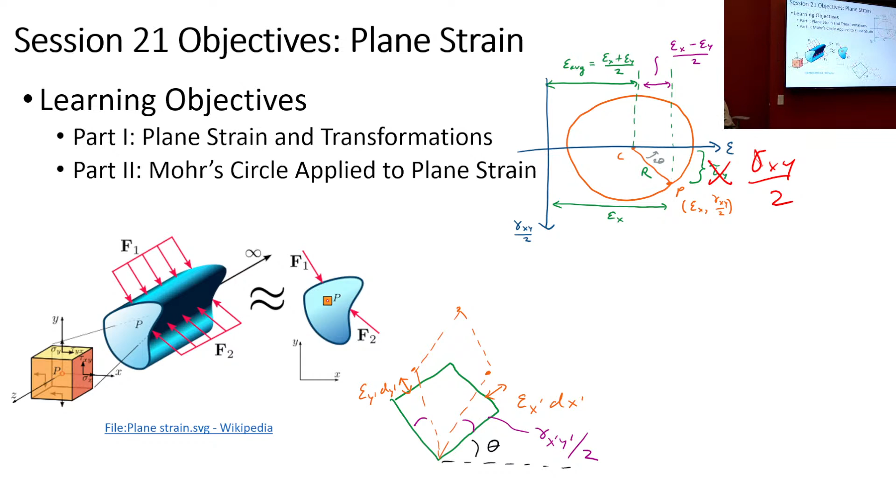And then, of course, we'll talk about how this is applicable to actual structures, and in particular, we'll cover how we use this with strain gauges. It's hard to know exactly what stress might be in a structure. If you've taken a look online, maybe you've seen things like photoelasticity. Sometimes you can get an idea of what the distribution of stress and strain might be in an object through image processing techniques. Another one is called digital image correlation. But the classic method that we use to be able to discuss or analyze what the strain and stress might be is through what we call strain gauges.

So, plane strain. Before we discuss the simplified nature of plane strain, we realize that if we're describing strain, we have 6 components, just like we had 6 components of stress, right? We can have 6 components of strain: epsilon x, epsilon y, epsilon z, gamma xy, gamma xz, gamma yz.

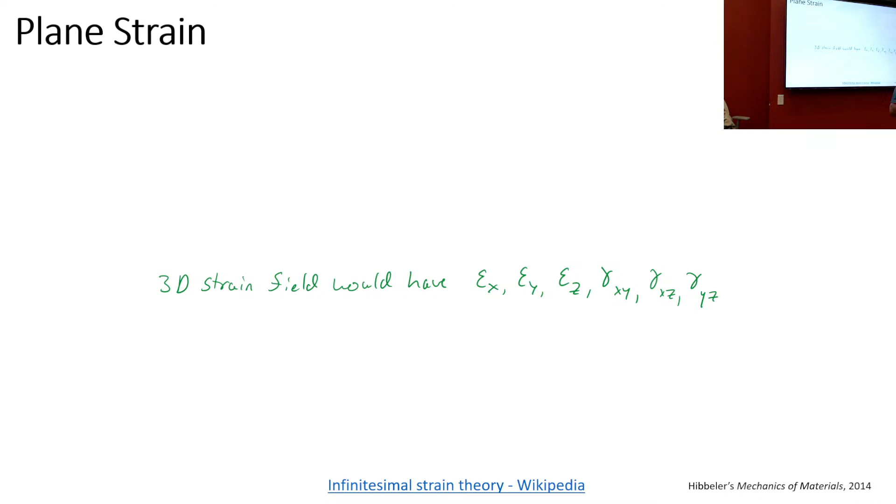But then just like we do with plane stress, where we say we're only really interested in plane stress, we're only interested in 3 components of stress for a plane: the sigma x, the sigma y, and the shear stress. In this case, the 3 components that we're going to be interested in are the gamma xy, the epsilon x, and the epsilon y.

But what are we really doing? What we're saying here is that there's no strain in the direction normal to the plane of interest. So what we're saying is that the strain, for example the epsilon z, that's going to be 0. We're saying that strains like gamma xz and gamma yz, where that second subscript has a component in the normal direction, we're saying those are 0 as well.

Typically, to think about this, we're looking at thick plates. That's kind of the image that we keep in our mind. So what's happening is there's not going to be much strain in that z direction. It's really thick in that direction.

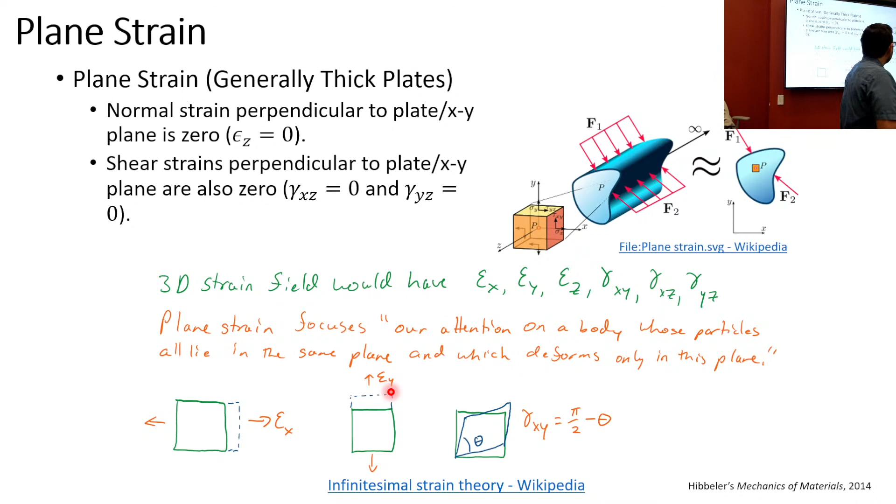Now, when we think about these two cases, the plane stress and the plane strain, we might think, when might they be the same? When might they be equivalent? It's a little bit confusing because we've got something that might be really thin, which is what we typically think about with plane stress. The prime example that we use for plane stress are thin-walled pressure vessels. And what we've said is that the stress in the z direction is very small, we've typically said that we're going to assume it's 0. In this case, we've got something that's very thick.

So when can these two cases be the same? And it's when the Poisson ratio is equal to 0. Now, is that real? Is the Poisson ratio going to be 0? No, not really.

Just as a refresher, what are we saying here? We're saying that if you're thinking about epsilon z, and you have stresses in x, y, and z, these are normal stresses, and we can think about the effect of the stresses in x and y on z. So if there's a non-zero Poisson ratio, then there can be some influence on epsilon z, assuming that sigma z is 0. And that's not what we want in the case of plane strain. In plane strain, what we're saying is that epsilon z is supposed to be equal to 0. So that's kind of the fictitious condition that we can think of when these two are equivalent.

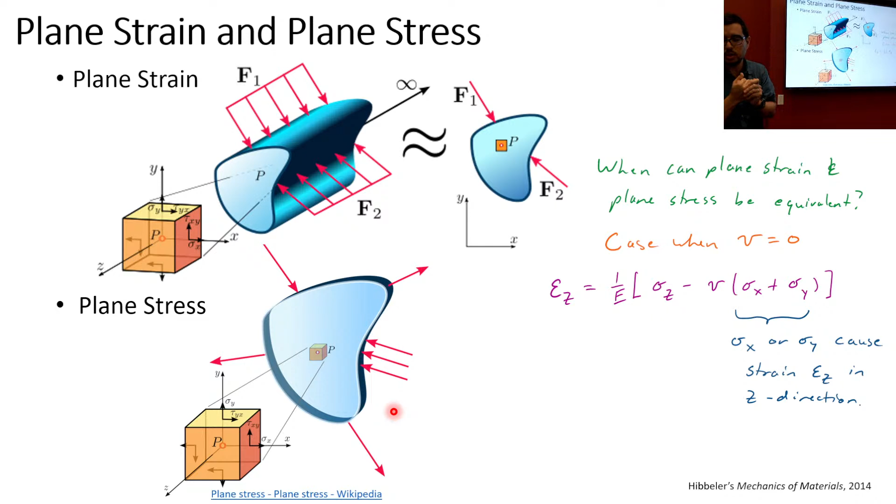We're going to say that epsilon z is going to be negligible in that particular case, at least for our intents and purposes for doing the transformations that we're going to do later. Okay, so now...

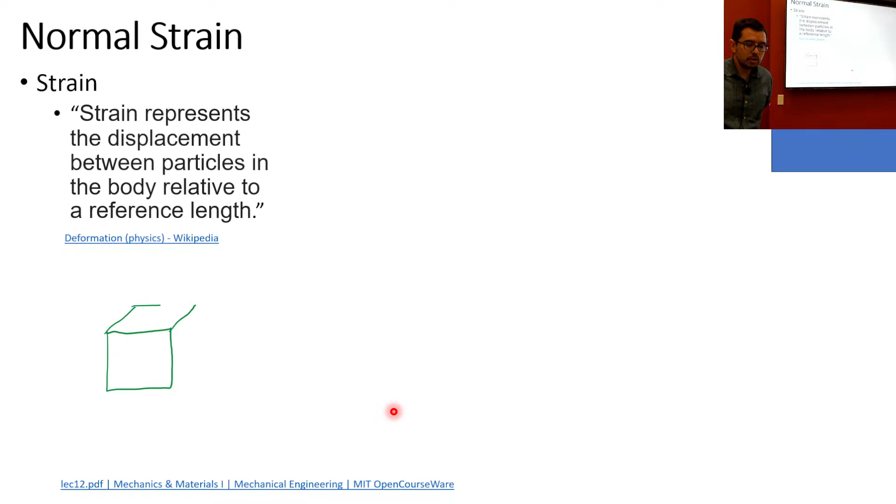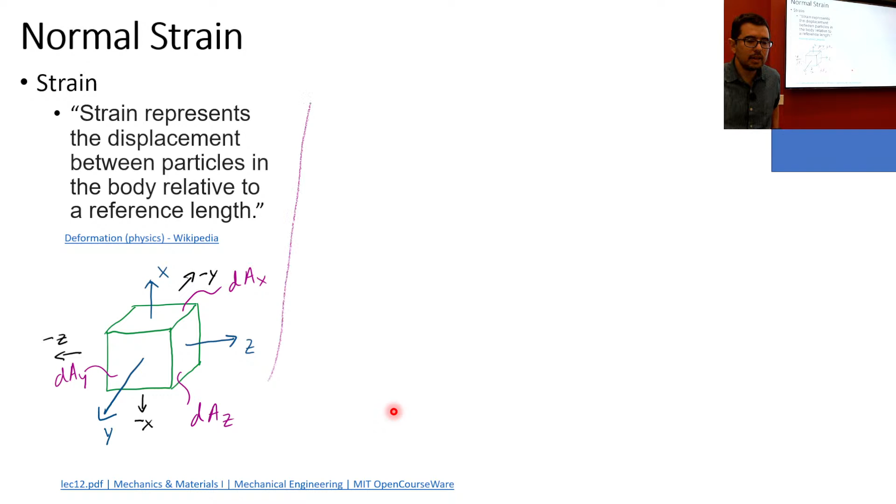Let's review. These slides are from the past, maybe with some slight embellishments, to talk about normal strain and shear strain in a little bit more detail. You can draw this element with some small areas for a type of cube, and we can draw out the 2D profile of the XY plane. This is the same thing we showed before.

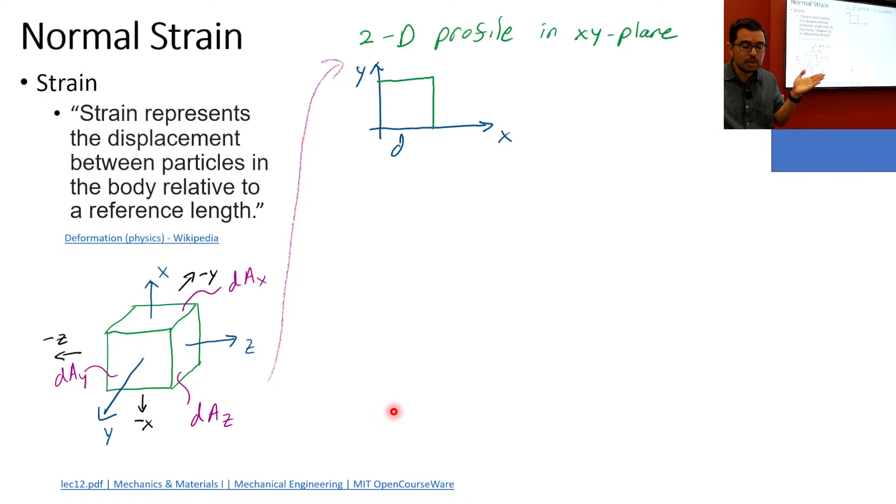We have a dy and dx, and we can think about how epsilon x and epsilon y are going to be influenced here. If there's some delta x, that's going to give us epsilon xx, which we simplify as epsilon x. And if there's some strain off in the y direction, we can think of it as epsilon yy, which is the same as epsilon y. So this is pretty straightforward, and we've kind of covered this.

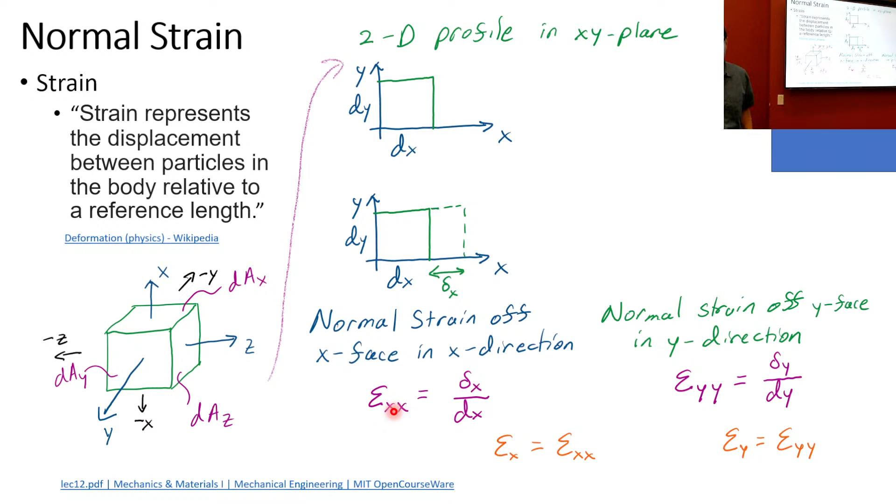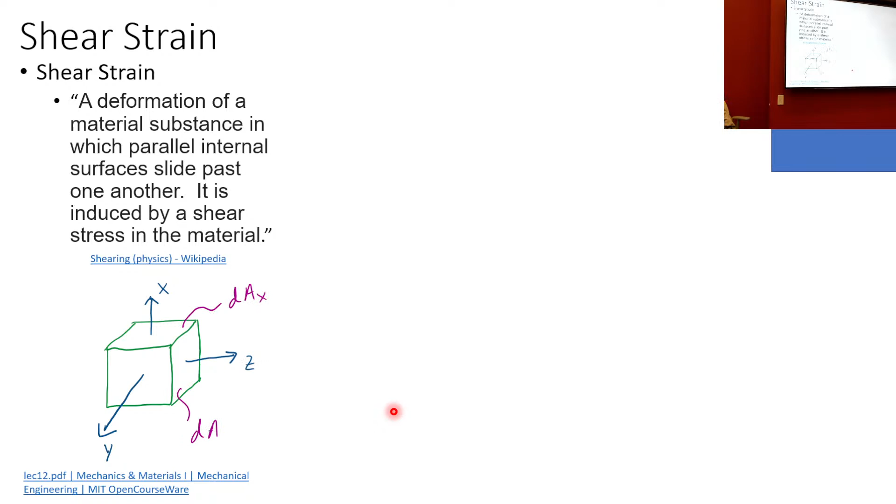Shear strain we've kind of covered as well, but it's a good reminder of what it looks like. Once again, we have our little cube with our coordinate axes, and we can look at the 2D profile in the XY plane. Like I was hinting at before, what we're talking about is we keep the bottom flat and we shear the top. Then we're looking at this displacement here, and this displacement here, and we're looking at the angle this forms - that's the shear strain.

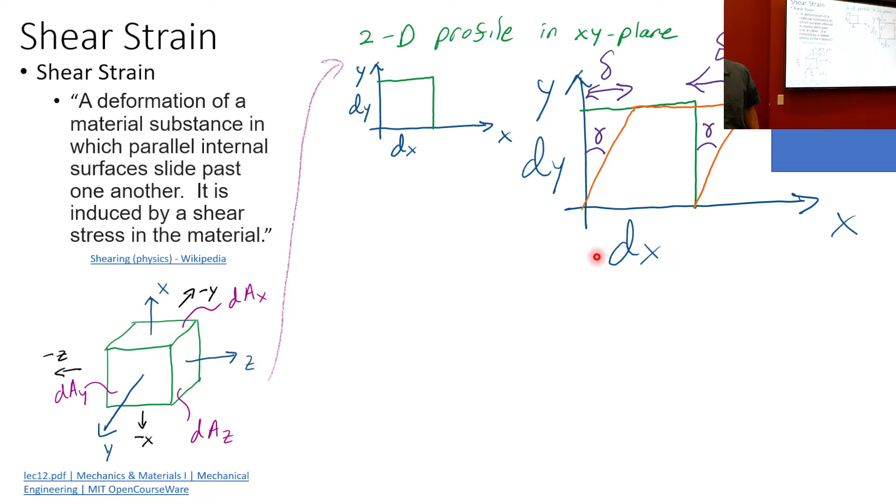Like we were talking about before, to be very clear or more precise, this bottom surface actually comes off for an element in pure shear. So we end up thinking about 90 degrees minus this angle. But in this case, we can say if I want to know this angle for gamma, it's going to be this delta over the dy.

And when you take fluids, you know that's how you calculate and think about shear stress in liquids, based on slipping between plates and the angle that can form. So that's a way that we write shear strain, and we can think of gamma xy.

And again, to be more purist, what you would see here is you're actually thinking about the summation of this angle below and above, and it's going to be 90 degrees minus the interior angle of this four-sided sheared piece.

Now, here are the general equations. You probably want to write them down for the final exam, not for Tuesday, because what we're covering today is not on Tuesday's exam. If you want to see the derivations, you can take a look at Hibbeler's book, or you can click on this link to see the derivations for these transformation equations.

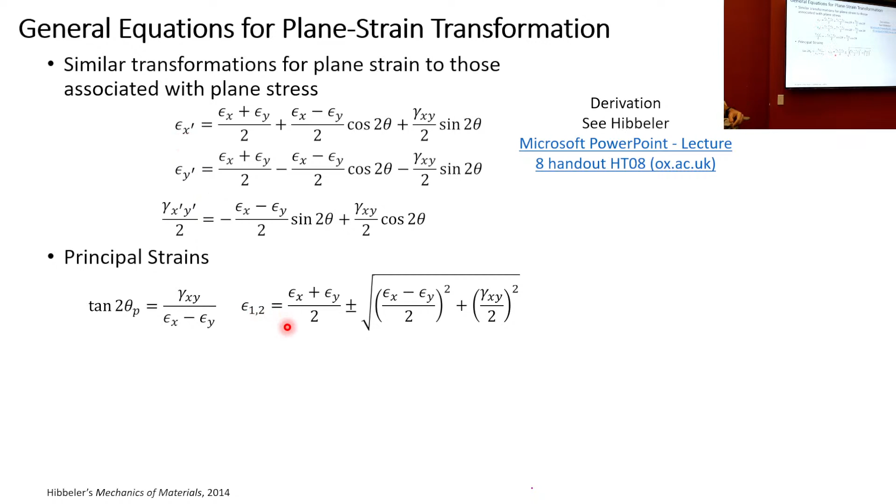Similarly, we can figure out when we're going to max out our shear strain by looking at the angle - looking at the equation here for shear strain, figuring out what the angle would be, and then plugging that back into the equation to figure out what the gamma max in-plane shear strain will be.

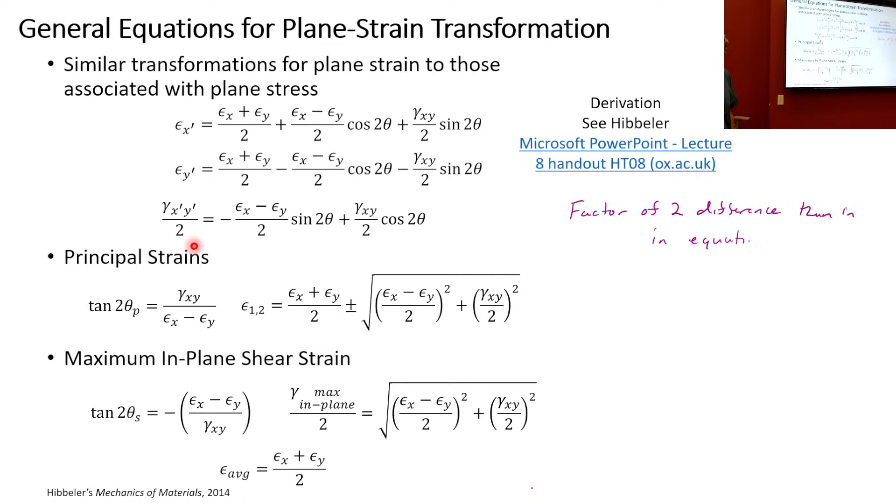These equations have an interesting property, though, right? What you see here is we typically wrote tau. When we're doing the shear stresses, we wrote tau x prime y prime is equal to this quantity, sigma x minus sigma y, or something over 2. And now there's another quantity, where this is not just tau, but it's gamma x prime y prime divided by 2. And so this factor of 2 comes into the equations, and it comes out of the algebra.

And in this case, there's not a factor of 2, right? This is like flipped. So if you had been doing the tau before, you might have had a factor of 2 here. But these equations are accurate. It's circling, like sometimes it was confusing because I circled a nothingness. It's circling that there's nothing there.

If you look at the substitutions, once again we're thinking about tau xy as having these parallel equivalencies. So tau xy goes to gamma xy over 2. Sigma x goes to epsilon x, sigma y goes to epsilon y, and these transformed versions do similarly. Any questions on this?

What is gamma? Gamma is shear strain. And just to be clear, gamma is this Greek letter right here that you're seeing, and this Greek letter is epsilon. Yes, gamma is the shear strain. The clue there is that it's shear when you have two subscripts that are not the same. You have xy as a subscript, and it's the same thing: those subscripts, the first subscript is the face it's acting on, and the second subscript is the direction it's acting.

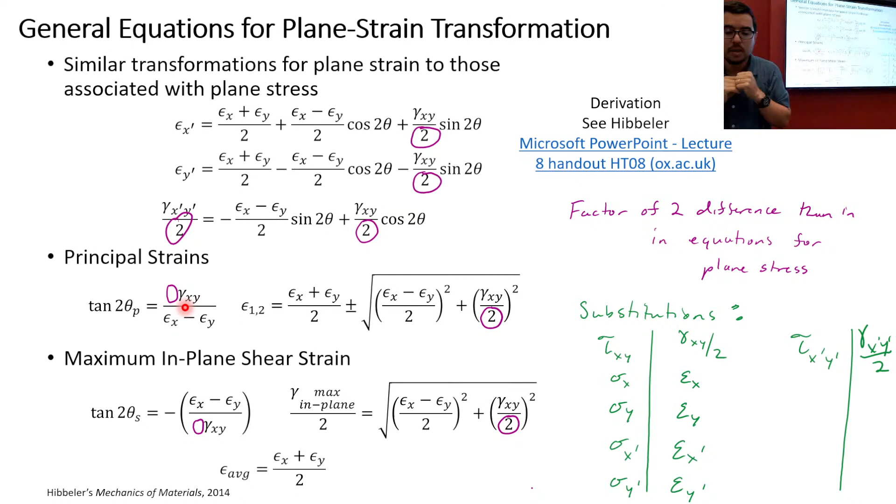And remember, Mohr's circle spits that out to us. Mohr's circle is on a tau-sigma axis, and we're going to cover this in a second. Or Mohr's circle for strain is going to be on epsilon and gamma over 2 axes. So you can get to the state, when you draw the circle, where you have two points on the sigma axis or the epsilon axis, which means the shear is zero in those situations. But unless Mohr's circle is centered on the origin, you can't get a state of pure shear. Because in order to have pure shear, you've got to be on the tau, or the gamma xy over 2 axis. Maybe that was a lengthy explanation, but hopefully that's helpful.

All right, so now let's spend a few minutes looking at an example. What is the state of strain for an element rotated 45 degrees from a condition of uniaxial strain? Uniaxial strain is like uniaxial stress or uniaxial loading, so we've got a strain in one direction.

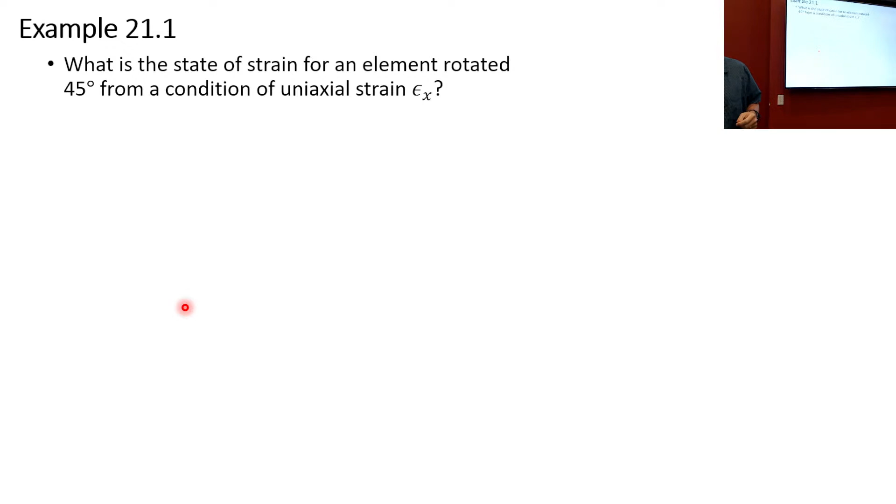These are the same exact equations we just had. What do we say? The element is rotated 45 degrees. That's not rotation of... we're talking about the element, right? On Mohr's circle, that would be a 90-degree rotation, but we'll do that in a minute. So it's kind of just plug and chug, all right?

You take a look at these equations, plug in theta equals 45 degrees, recognize that's 2 theta, so it's going to be 90 degrees. Recognize that in uniaxial strain, in this case we have 0 shear strain, and epsilon y is equal to 0 as well. So we get rid of those other terms, and the new epsilon x prime is going to be epsilon x over 2. We go down to epsilon y prime, plug it in here, and we also get that it's going to be epsilon x over 2.

And we look at gamma x y prime, remembering that there has to be a factor of 2 over here, and we can write out that it's just going to be negative epsilon x over 2. Then we have the 2 and the 2, and so we can say that gamma x prime y prime is equal to minus epsilon x.

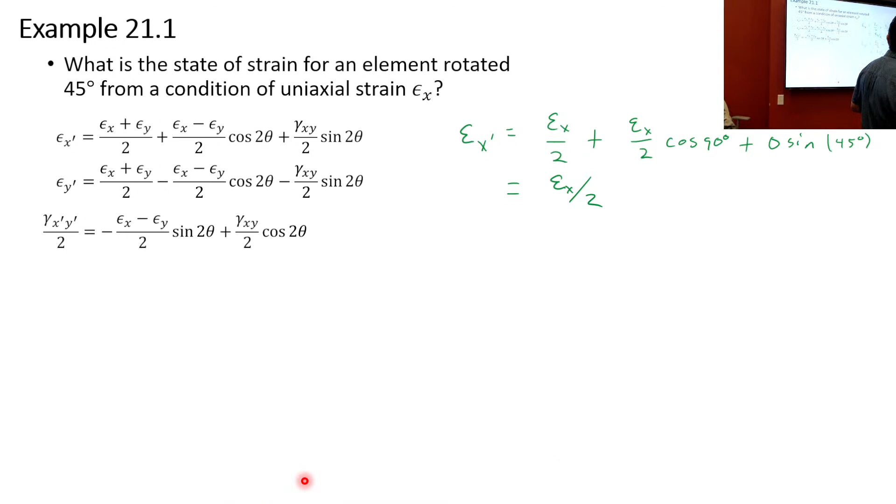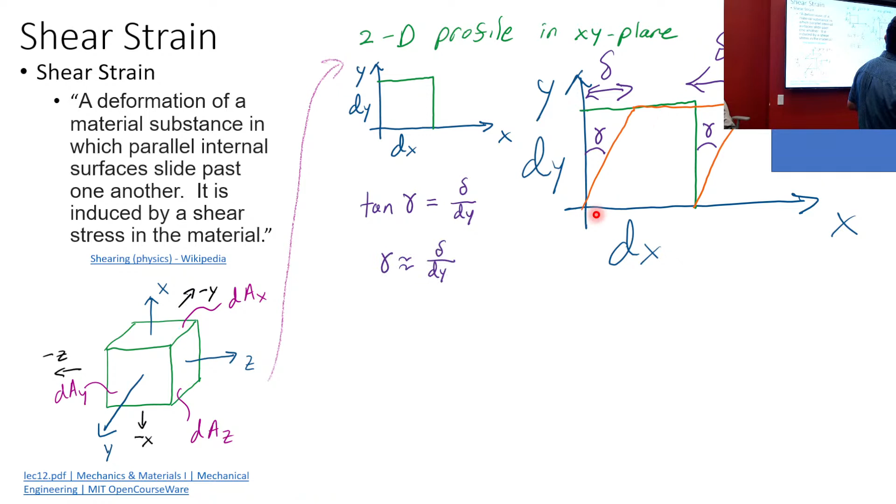Okay, and it's half the shear strain, because if we go all the way back to here, remember we said if I keep the flat bottom flat, then it's just that angle. But if I pump it up, if I let it deform purely, then I have these two angles, and it's the summation. The gamma is the summation of these two angles outside.

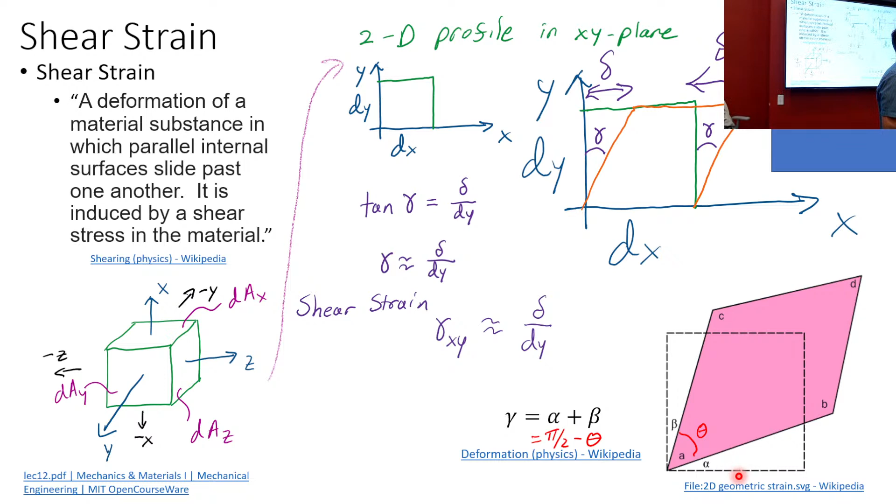And that's why, if it's symmetric, if alpha is equal to beta in this case, then they're going to be equal to each other, so it's going to be half of the shear strain. It's a little confusing, all right? That's why we're trying to clarify things a little bit here with this example.

Other questions on this? Are you raising your hand, Chris, or just stretching? Other questions? Yes, Kevin. So to write up the final answer, to describe the state of strain, would an acceptable answer comprise of strain y prime, strain x prime, and just putting it symbolically like that? Or how would we?

Yeah, so for these, if I don't say use Mohr's circle, just use the equations. I don't like, personally, these plane strain transformations are a little less, they're a little unnerving to me compared to the plane stress transformations, okay? But you don't need to worry about this for Tuesday.

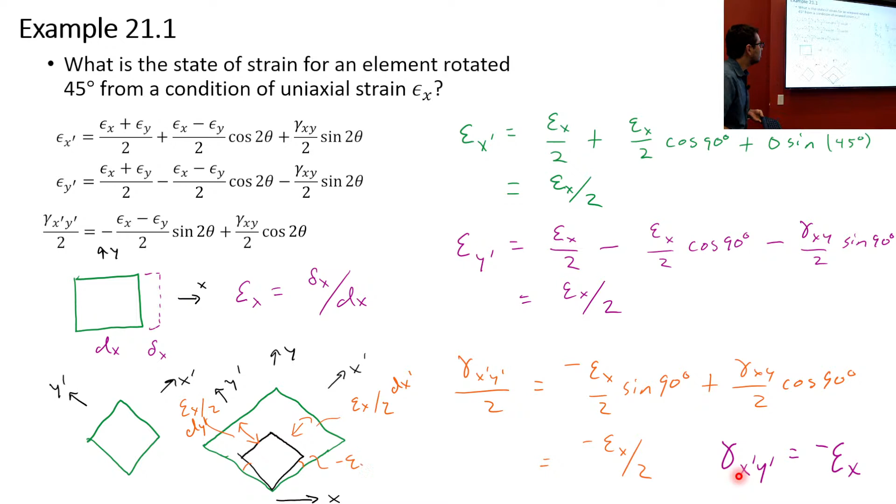Okay. Example 2. Now we're saying we've got normal strains of epsilon x and epsilon y, all right?

And now what we're saying is just rotate by some theta and tell us what is the new state of strain. What is the state of strain for an element rotated theta when you have epsilon x and epsilon y, as you see here.

So in this case, you plug in these values, just like you see them, and now we can write out the new state of strain.

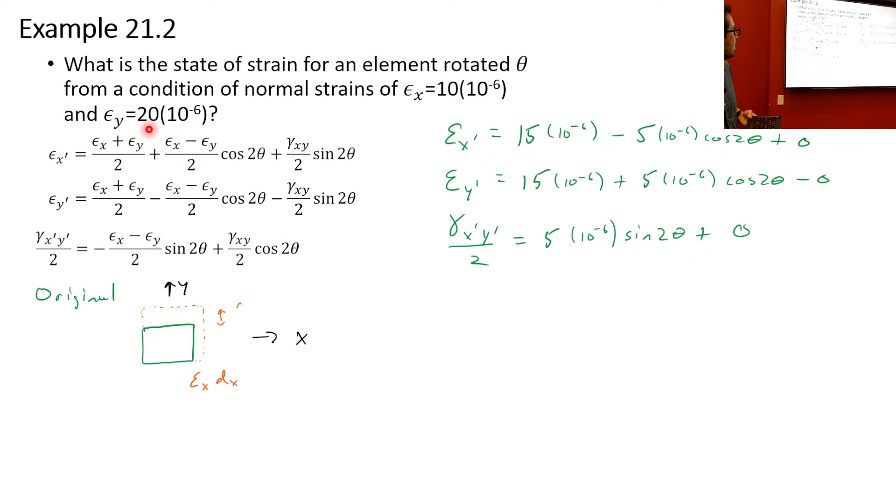And if we think about it, the original might have looked something like this with x, y coming out. And now we've deformed things where we have epsilon x, we have epsilon y, and now we're rotating, and the new element might be rotated like that, and the new strain element might look something like that.

And now we're saying that we have a new epsilon x prime, and we have a new epsilon y prime, and we also have these two here that are going to be the gamma x prime y prime over 2. So we've now gotten a little bit comfortable, hopefully, with using these transformation equations.

Now, do you remember this slide? This is from session 9, a long time ago. And while exam 2, technically you can go all the way back to session number 1, I'm not going to limit anything. But session 9 is kind of where, practically speaking, I think you might want to start.

We talked about Hooke's law for pure shear, and we introduced G. What is G? Shear modulus, right? And physically, what is G? When we're talking about relating shear strain and shear stress, what is G?

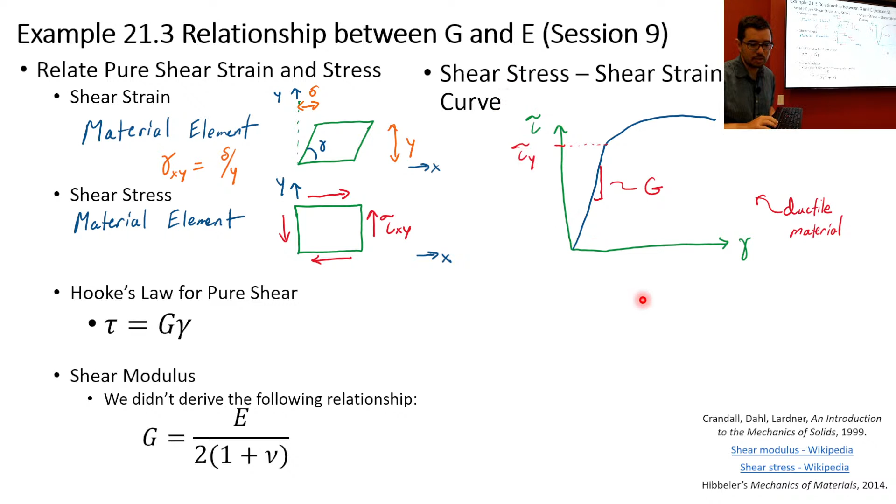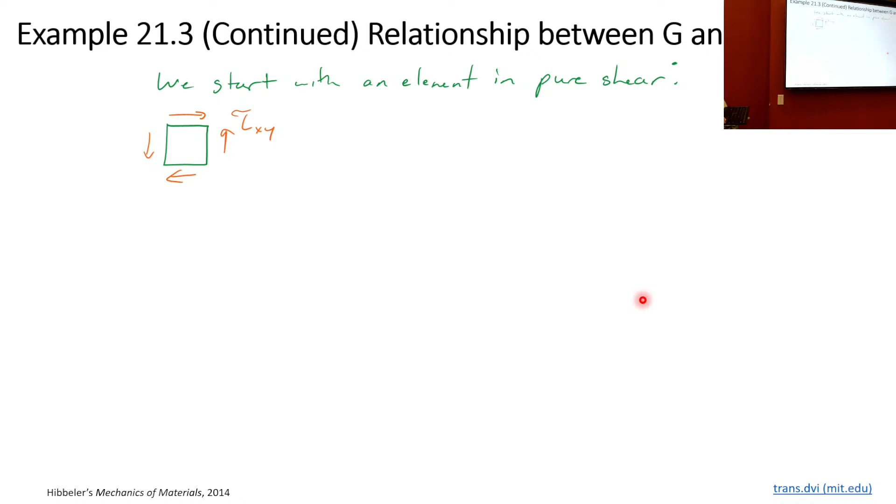So for this derivation, we start with an element in pure shear, and it looks something like this. Then we say let's rotate the element by 45 degrees.

So on Mohr's circle, in the old good days, when we had plane stress. Remember we were saying, what is going on? It's not exactly a great idea to relate and say that plane stress and plane strain are equal. We're going to forget about that just for a second. So this is Mohr's circle, and we have our sigma 1, sigma 2, and our sigma 3.

And we've rotated by 45 degrees. How do we get that? Because this is pure shear, so we started here and here, and then we rotated 90 degrees on Mohr's circle, so we got to here and here. The radius of that Mohr's circle is just tau xy.

So now we've got this nice, interesting relationship where we have a sigma 1 coming out, and we have a sigma 2 going in, and they're equal and opposite to each other.

We know from our constitutive relationships in the past that epsilon x can be given as 1 over E times sigma x, or this quantity, minus the Poisson ratio times the summation of the normal stresses. And we're going to say, okay, this is what epsilon 1 is equal to.

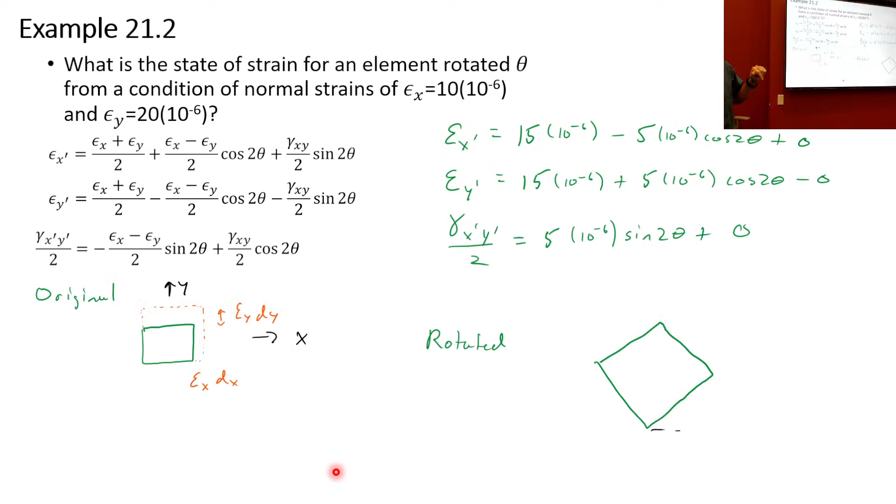So if you're working on it, the thing you want to be looking at, the most similar example to what we just discussed.

You rotate the element by 45 degrees to get the relationship between Young's modulus and shear modulus. Is there a reason why they chose 45 degrees to describe the rotation? It seems arbitrary. The reason we did it is we also started with an element that says pure shear.

G, right? Another use of G is to describe the relationship... you're not thinking about strain. But how is that 45 degrees? Is it just that 45 degrees is where there's typically...

Well, 45 degrees is the reason we go from pure shear. To go from maximum shear stress, I go from maximum shear strain to principal stress, I go 45 degrees on the elements.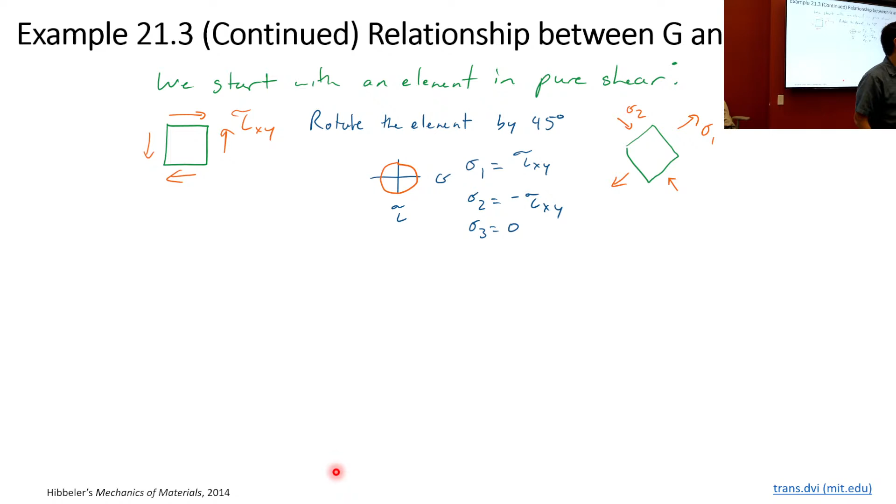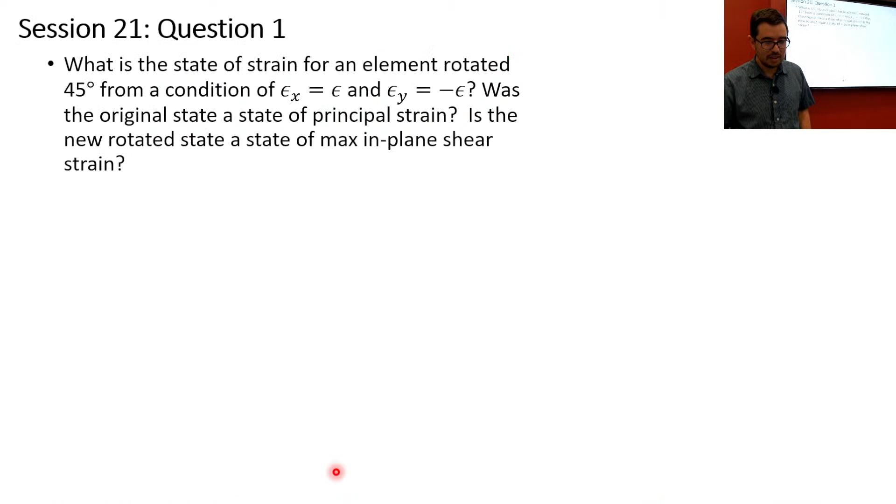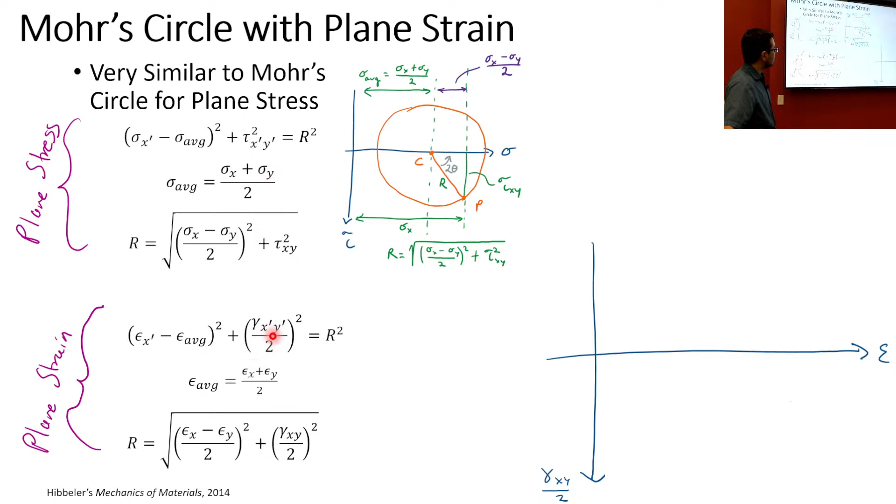When you look at plots sometimes, you convert them between units - is that in meters, is it in millimeters, whatever. Or sometimes people will say this is in decibels, and you've got this 20 log 10 thing going on. It's not much different here. What we're saying is we've got a factor of 2 inside here, and we're just going to make that our y-axis.

And once again, to make the rotation of an element in a counterclockwise direction the same as a counterclockwise direction on Mohr's circle, we're going to define that shear strain to be positive going down.

So we have the center of the circle, as given by the average of the normal strains. We have our epsilon x and our gamma xy over 2 as being a coordinate on the Mohr circle. And we can figure out where this would intersect the epsilon axis, and figure out what that distance is. We can figure out what r is that way, because you can use the Pythagorean theorem again for this and this side, and that's what you get here.

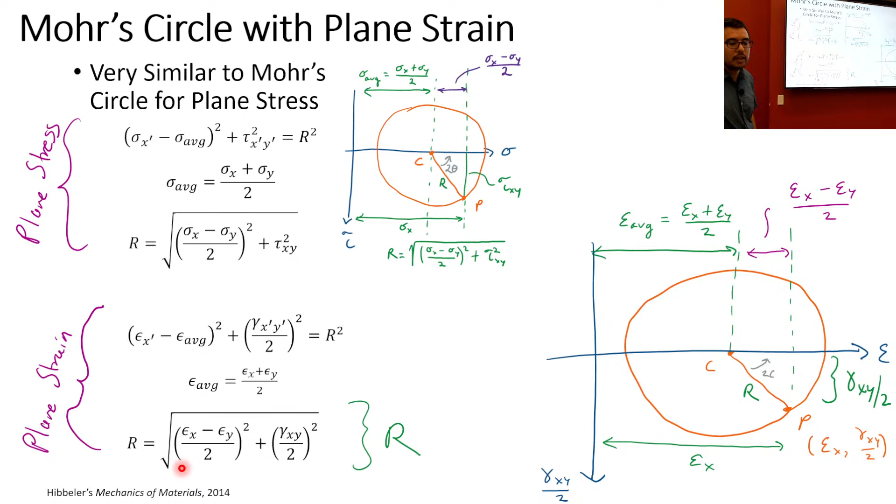Any questions on this? So here's another question. Now, if we have a Mohr circle, what is the epsilon z in this case?

Okay. Like for this next one.

So the first question here is asking us to look at what the largest principal strain is. So when you have largest principal strain, how many more circles do you typically have to draw when you're looking at principal stresses? When you want the maximum principal stress? It's 2 more? Okay, so typically just 1. Typically you only need, if you're looking at the maximum one, you're going to draw...

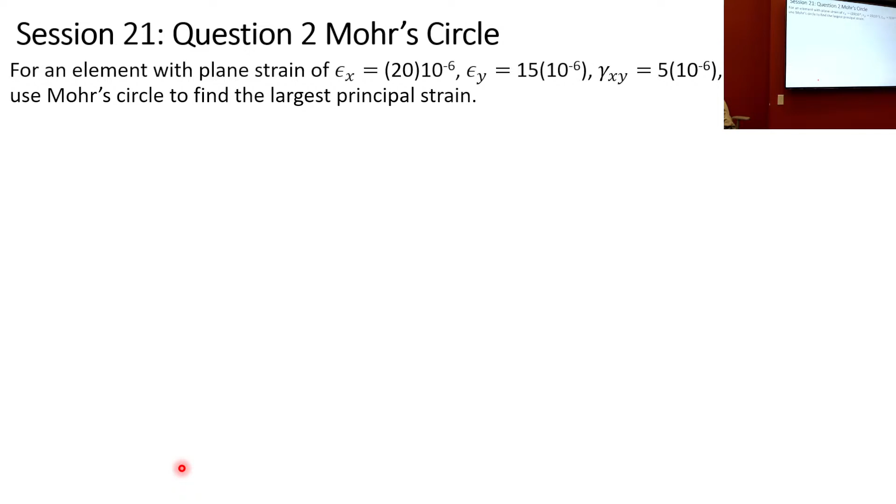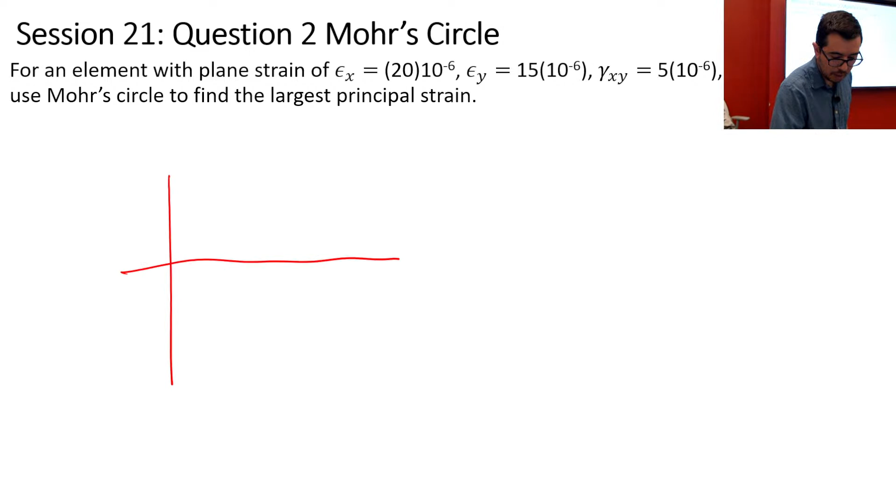Okay, so in this - sorry, that should just be gamma over 2, not xy, because you have transformations. Typically what we're looking at is, in this case, plane strain. And if they want the maximum, the largest principal strain, we already know that epsilon z is equal to 0. So we only need to use 1 more circle for this particular part, because we're interested in the largest principal strain. Where is the largest principal strain? Right there.

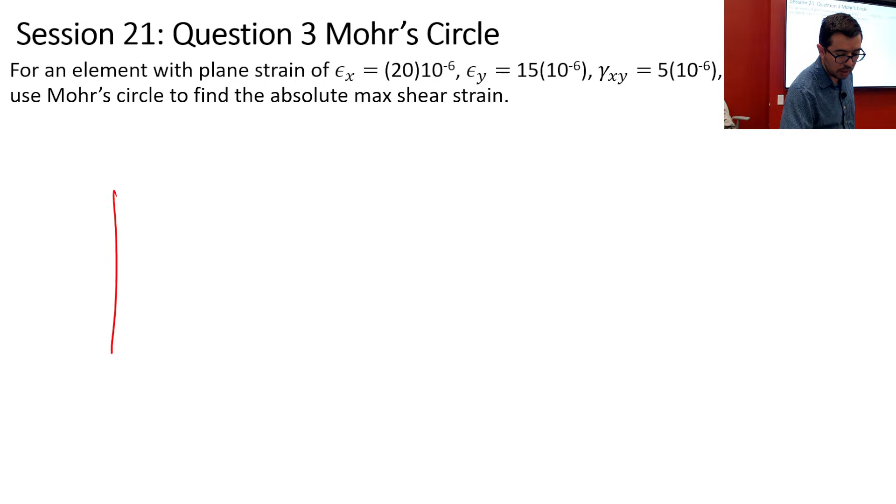Okay, like that. So we're usually only concerned with this one. But when we look at a question where we have to find the absolute maximum shear strain or stress - and this is maybe a little bit of a review for Tuesday because you will need to be able to calculate the absolute maximum shear stress - that's when you want to be careful and make sure you've got all three.

So if you had some type of state like this, you're going to draw another one, because we know that epsilon 3, epsilon z, is equal to epsilon 3 is equal to 0. And that's this point right here. This one right here, that's going to be epsilon 2. This one right here is going to be epsilon 1. So we're interested in drawing the third, assuming that epsilon 1 and epsilon 2 are both greater than 0. Assuming that just because epsilon x and epsilon y are both greater than 0, that does not mean - because you can imagine some rotation where one would go negative, your epsilon 2 would go negative. But if your epsilon 1 and epsilon 2 are both greater than 0, then we have to be concerned about calculating out or drawing out the largest Mohr's circle.

Okay, yes? Since you're graphing gamma over 2, does that mean like if you have your radius straight up, your radius is giving you half the... Yeah, so you're going to calculate your radius.

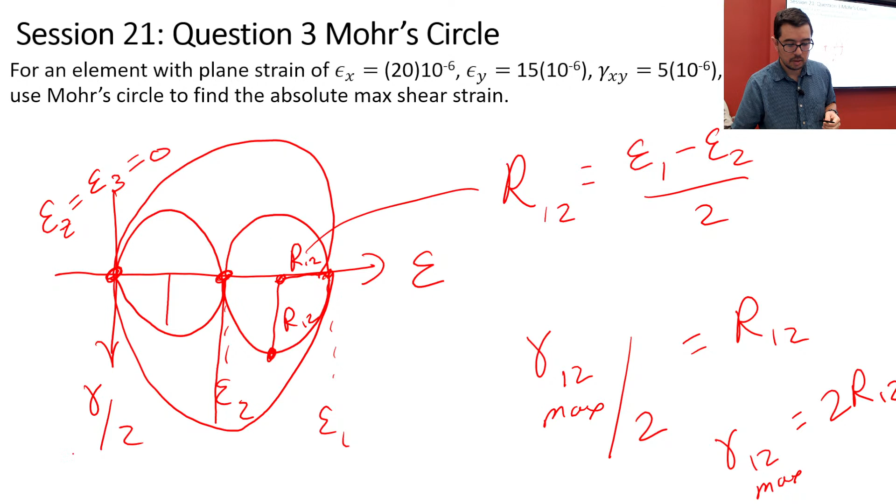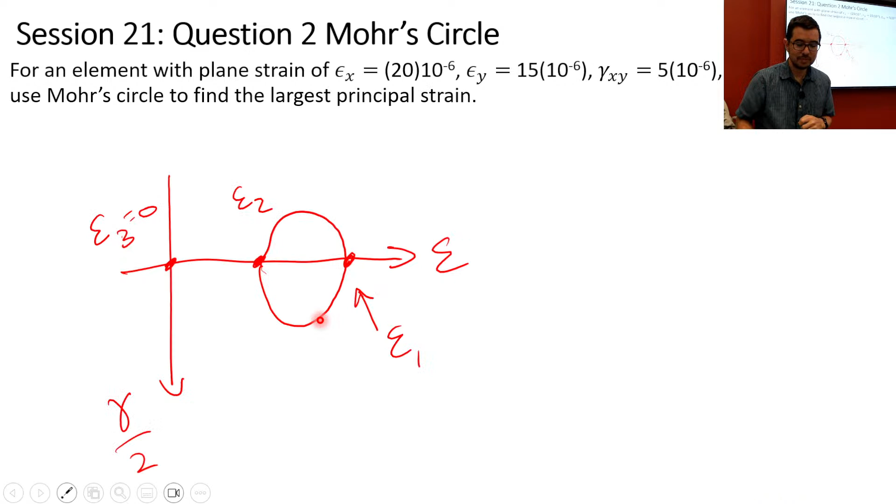Okay, are you talking about the principal strain? Are you talking about the maximum strain? Or absolute max shear, or maximum, or the principal strain? Absolute max shear, okay. So in this case, once you figure out what epsilon 1 and epsilon 2 are, you've got to figure out what the radius of this circle is. And that's what this is, and that's going to be the absolute max shear.

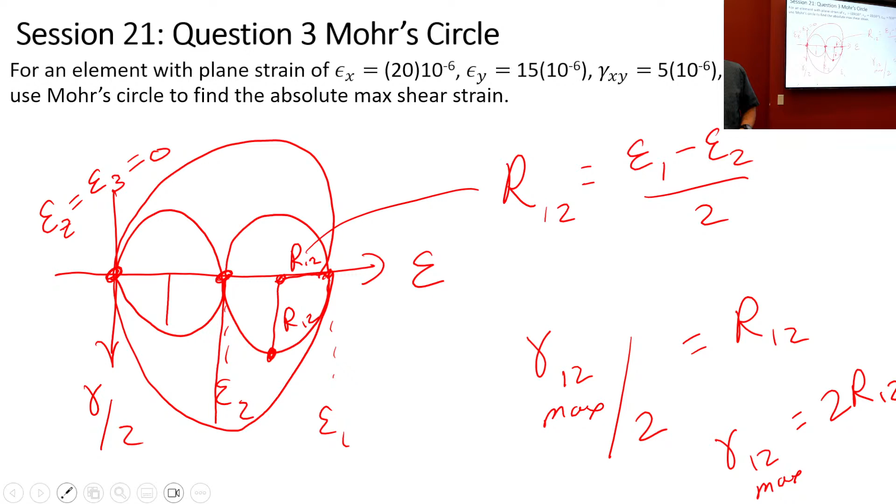So finally, following what we've been doing with our treatment of plane stress, we're going to do it with plane strain. We're going to talk about the use of these transformations on a structure. This is a little different because now we're discussing how you can actually experimentally characterize what the state of stress or strain in the structure is with sensors.

Strain sensors allow us to measure the strain on the surface of a material. Our group has done work in wireless strain sensing with NASA, because we were interested in designing a strain sensor that didn't have wires going to it, that might be on the inside or outside of a pressure vessel. If you have to drill holes through that pressure vessel to wire to your strain sensors, that could be annoying. Or maybe you've got cabling that you don't want to run from one beam to another to get to the strain sensor. So if you can address it wirelessly, that can be useful.

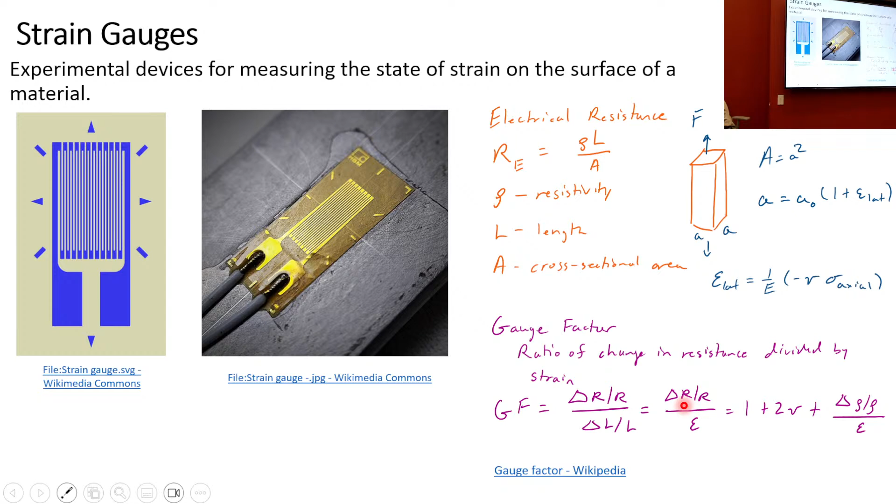One strain gauge can help us understand extension in one direction. But what we do sometimes is use multiple one-directional strain gauges to figure out what the state of plane stress or plane strain might be on the surface.

As we know, a cylindrical pressure vessel in particular has a hoop stress, hoop strain, and a longitudinal or axial stress and strain. So we can pick different orientations of these strain gauges relative to each other, and these are called rosettes.

So we get 3 directions out of this. How many parameters are we trying to measure? Sigma x, sigma y, tau xy - 3. Or epsilon x, epsilon y, gamma xy - 3. So that's 3 sensors, 3 unknowns.

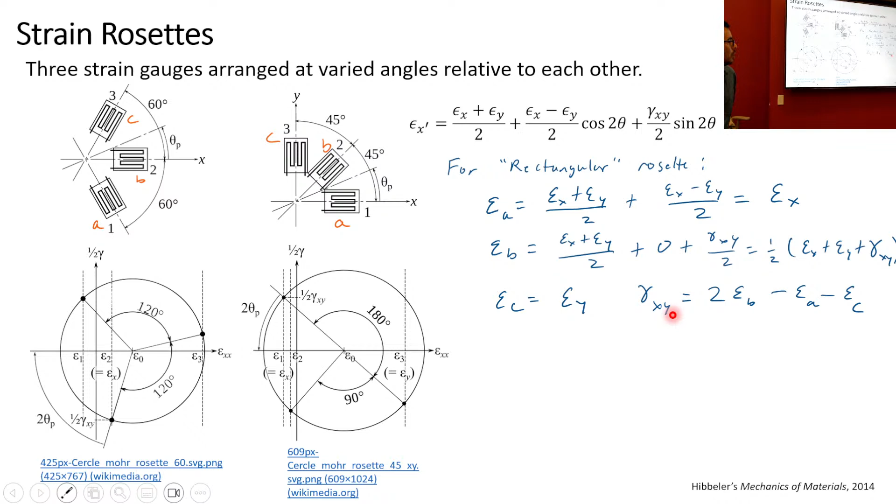Similarly, for 60 degrees, we can use these equations to figure out what the relationship is between the strains we measure at these different locations, and what epsilon x, epsilon y, and gamma xy might be.

And so these are the transformations - it's a little bit more complicated. Ultimately, we have relationships that tell us what epsilon x is, what epsilon y is, and what gamma xy is. Any questions on this?

You see what we've done here? We're using our plane strain transformation equations with these strain gauges at different angles to calculate out what the state of strain is in an x and y direction.

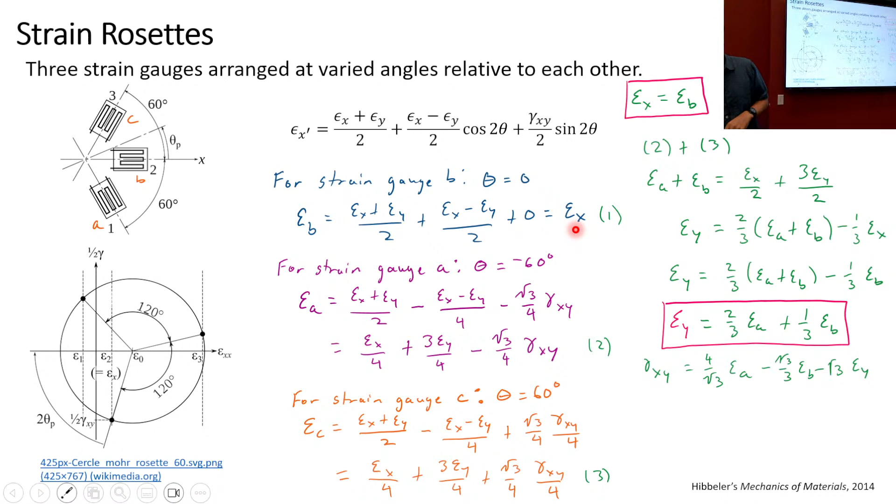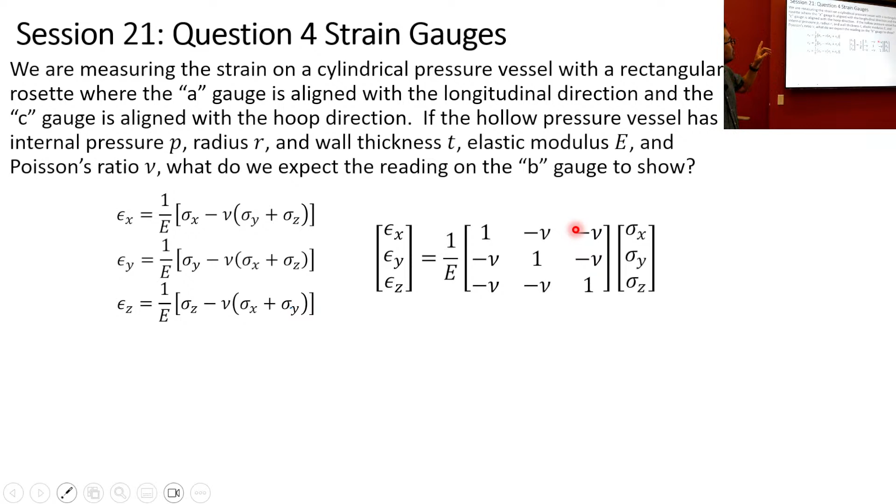So you'll get an opportunity to work on calculating out what the state of stress is, given a rectangular rosette where you have an A, B, and C gauge. And that covers what we've wanted to do today.